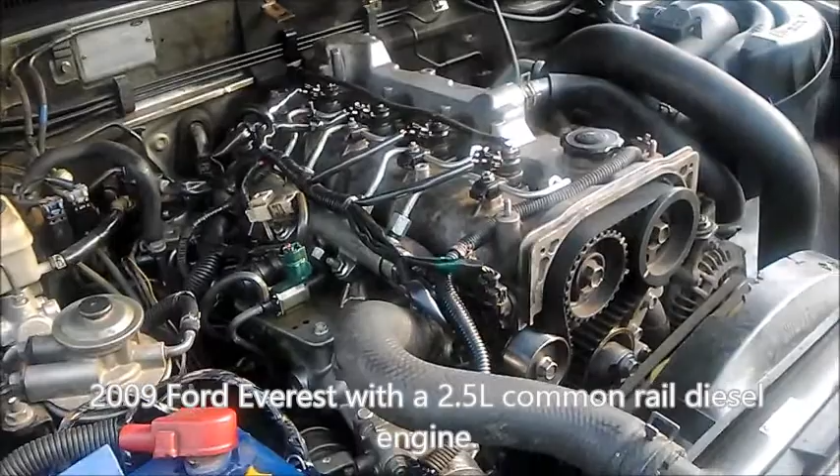Okay, what we have here today is a 2009 Ford Everest with a 2.5 common rail diesel engine. The owner purchased it from an auction. The engine wasn't running. I think it would crank, start, but run very poorly and would stall. So it was towed here.

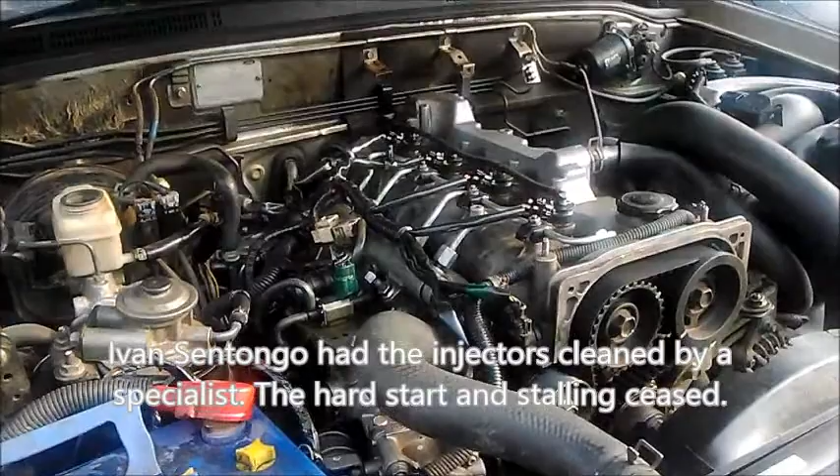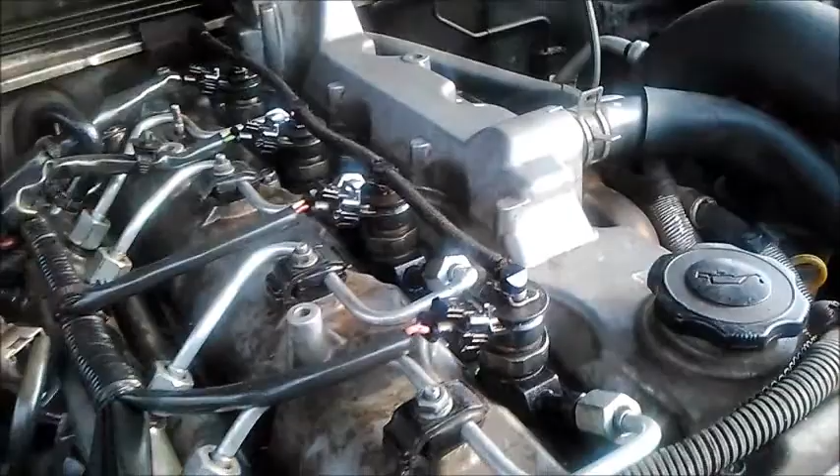Ivan took the 4 common rail diesel injectors off and took them to specialists. They were cleaned up, brought back on the vehicle. The vehicle now runs and actually idles in a stable manner. It cranks fine and idles fine. But the customer complained it felt like it was sluggish, it didn't have power.

So Ivan came, looked at the timing, found it was off a bit, redid the timing and ran again, and the engine is running again. It hasn't been test driven yet, and I walked in this morning and was asked to have a look. So that's where we are at right now. Engine runs, timing has been done, road test not yet done.

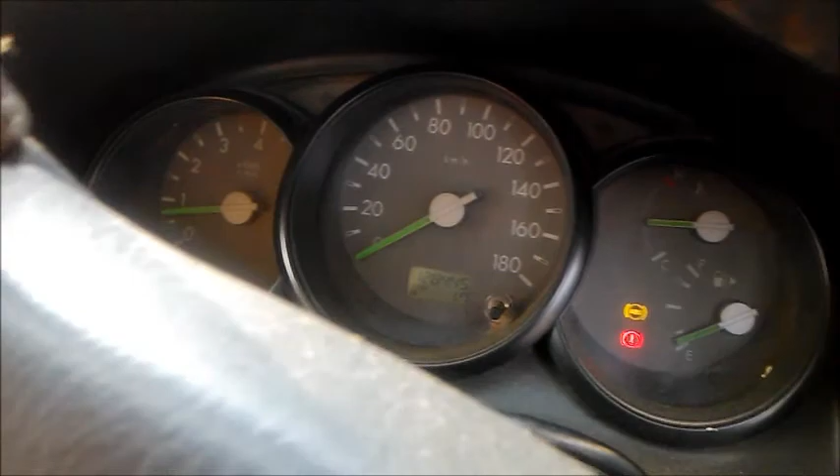Just double checking that there is nothing electronic wrong with it. So that's the engine. We shall go into the vehicle now. It's a 2009 Ford Everest with a common rail 2.5 liter diesel engine. Okay, I'll crank the engine first so you hear it running. Yeah, it's running. Check engine light goes out, but not the ABS light. I'll check that out too.

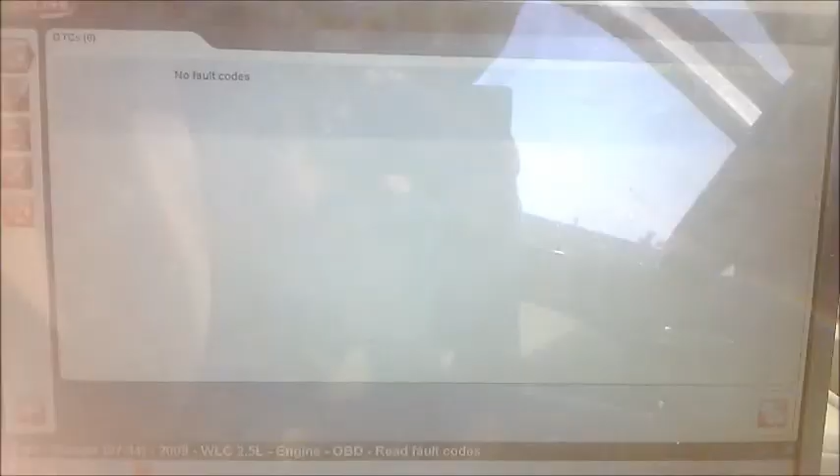So we come to the diagnostic computer. I've already set up the software for the vehicle. Okay, I'm now in. First checking that there are no fault codes on the engine control module, and indeed there are none. Out of interest, I'm first checking why the ABS light is on. ABS will be under brake.

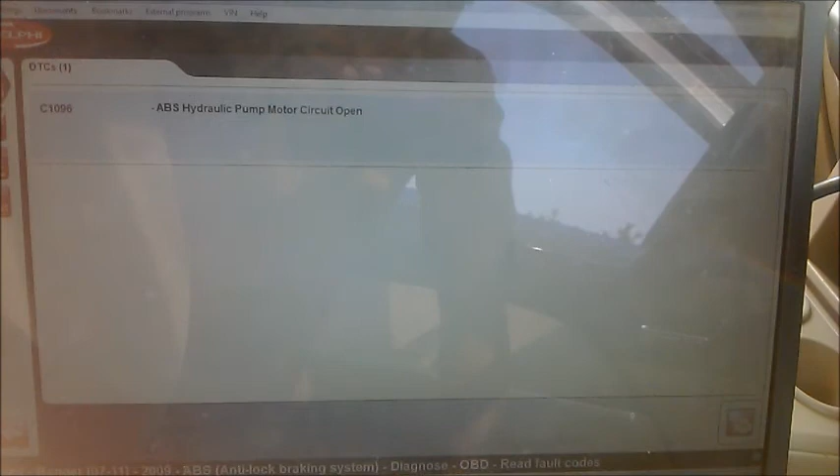Okay, we have a C1096, that's ABS hydraulic pump motor open circuit. So I'll have Ivan check that out. I think that's not a very difficult case to diagnose. I think it's just two wires that feed the hydraulic pump motor. It's very easy to check out its open circuit. This vehicle has been sitting for a long time in some yard where it was auctioned off, so maybe there is a socket off, or the motor itself is bad, whatever.

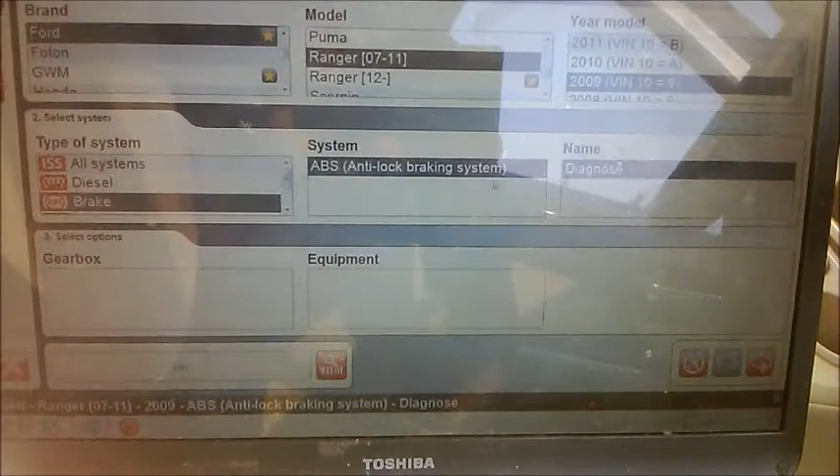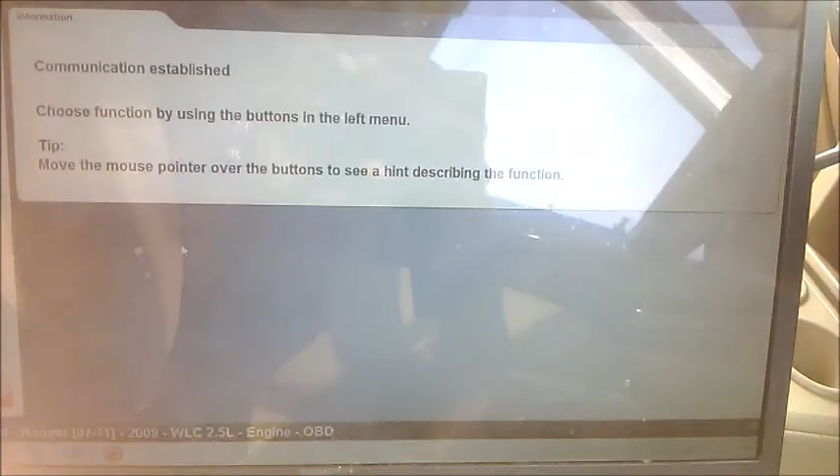Okay, I'll go back to the engine issues, which is where my main interest is today. Once again, no fault codes. After that, I want to go into real-time data, and actually, I wanted to look at the fuel pressure, but this engine is idling normally, and even when you step on the accelerator pedal, the engine runs okay, sounds okay. So I think the fuel pressure is okay.

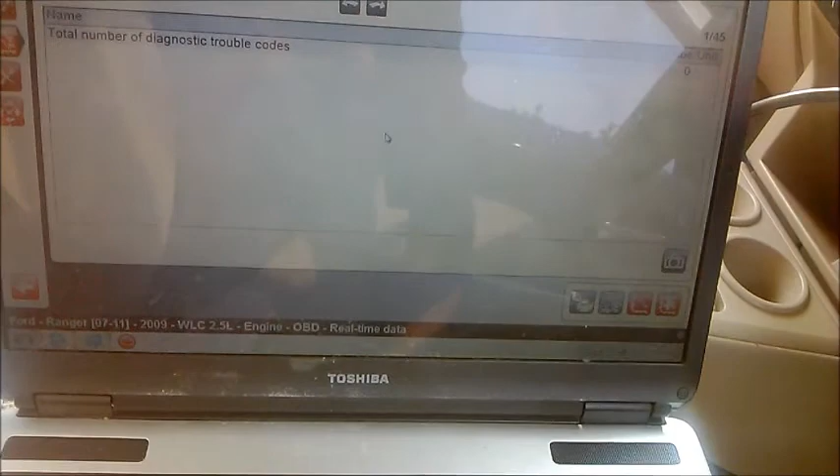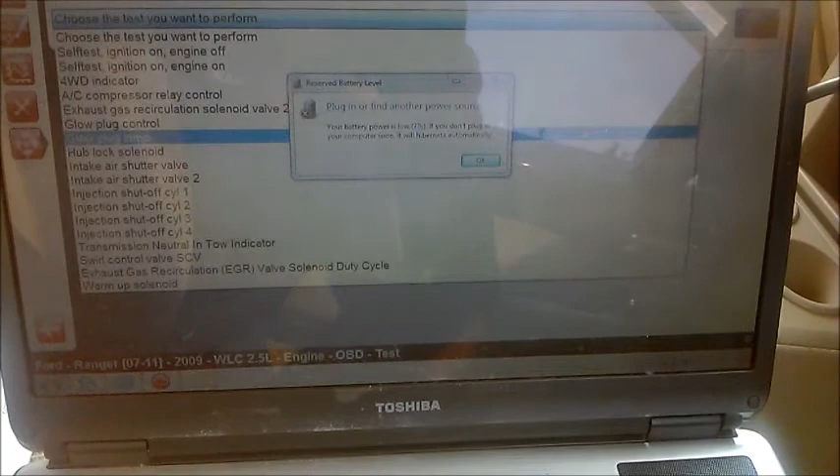I'm not really going to go into that at this moment. I want to check that all the injectors are contributing kind of equally. So I'll ignore the real-time data for now and go into the engine testing software. Oh, my battery is running low. I want to test the injectors first. Injector number 1 contribution. I'm testing it. I don't know if you can hear the vibrations. It kind of misfired a little when I shut down injector number 1, which tells me that injector is contributing.

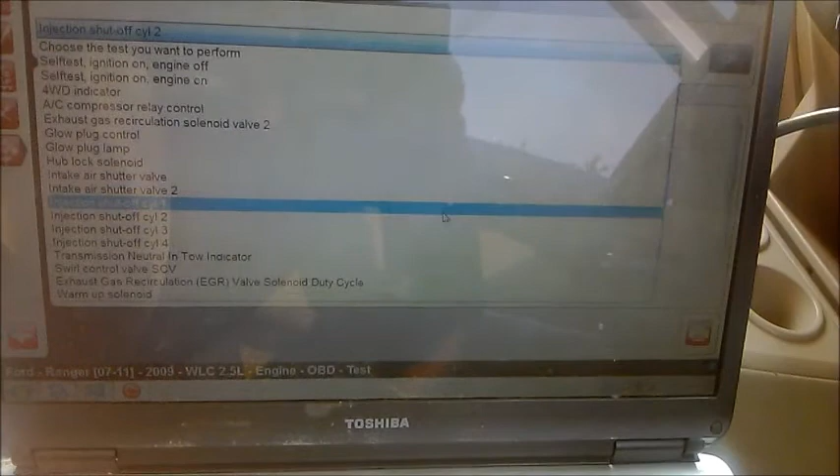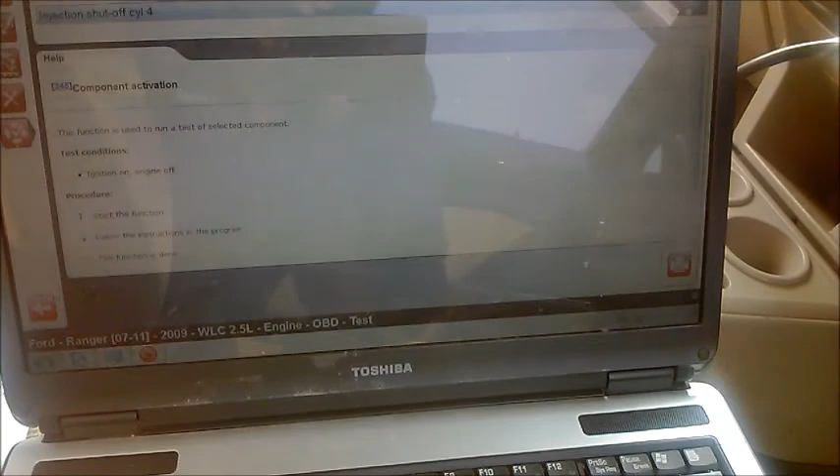I'm doing the same thing for number 2. A bit of misfire, so that injector is contributing. Number 3, engine misfiring. I don't know if you can see the shaking of the cable here when I do that. So that injector is also contributing. And then we go to the last injector, injector number 4. That's a bit of a misfire when I shut down that injector temporarily. So all the injectors are contributing equally.

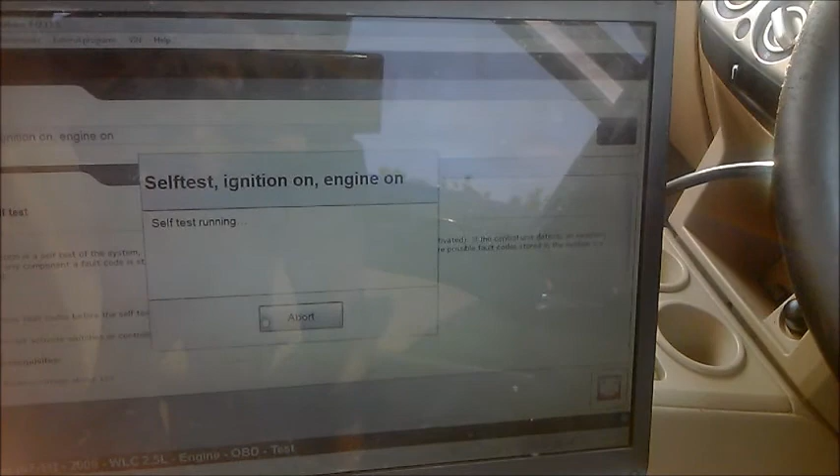I'm also going to tell it to do a self-test with the engine running. So the ECM is going to do a self-test. Oh no, just about to command it. Okay, the self-test has started, and you can see the engine vibrating. I think it's testing the injectors and other components. It's misfiring a bit, so it's checking various things.

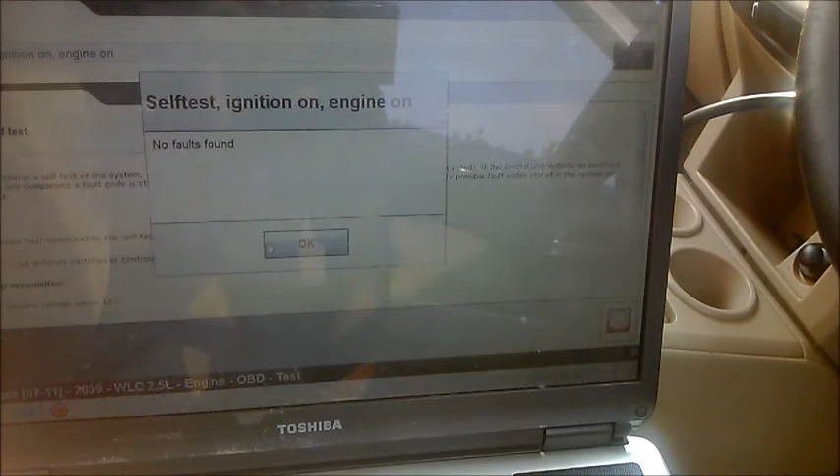Still misfiring. Okay, it has finished the test. The engine is running okay now and says it hasn't found any faults. Okay. No, I'm not going to erase any codes because there are none anyway.

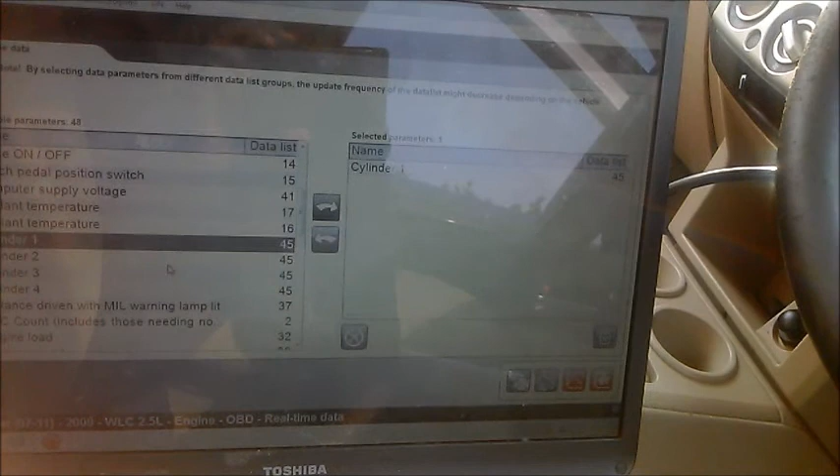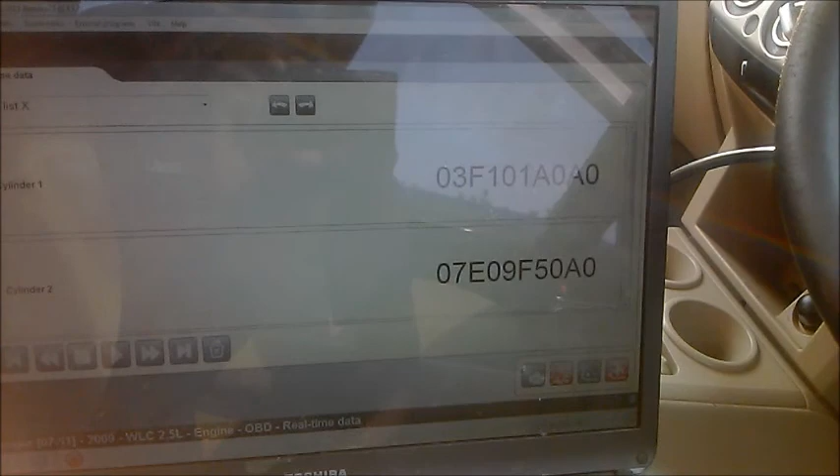So I want to go into real-time data again, the custom list, and my main interest is in seeing the data for the programmed IDs for the injectors, plus maybe I can throw in the... okay, that's what I want to see for now. And okay, that's the programmed injector information.

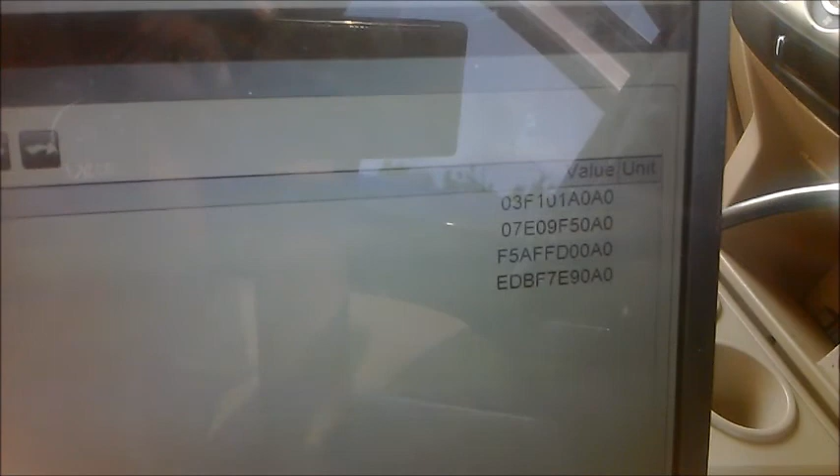Those numbers, you normally find them on the injectors themselves. They are normally printed. They tell the engine control module the characteristics of the injectors. So the engine control module deals with the injectors knowing their characteristics, and it handles each injector separately from the others.

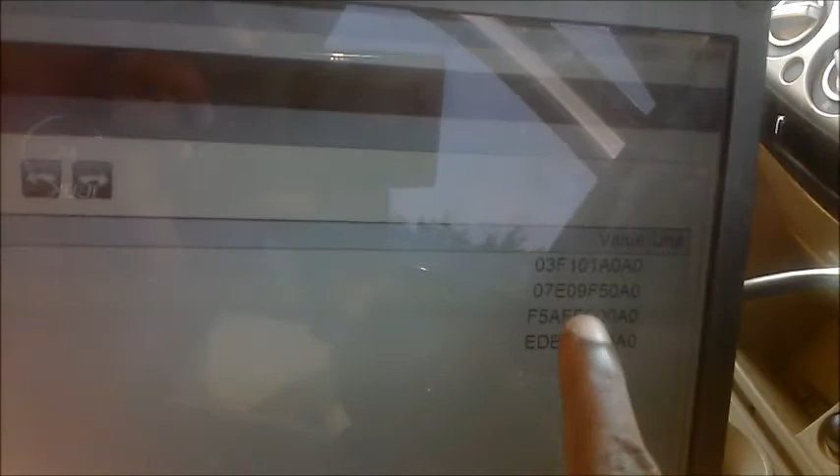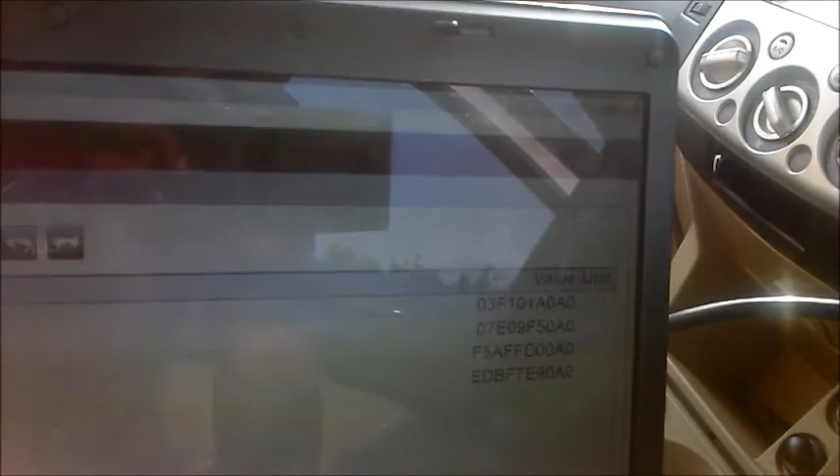So I need to be sure that what I'm reading here, in that order, those numbers are matching on the engine. In other words, the injectors are in the correct positions on the engine according to how they were programmed on the computer.

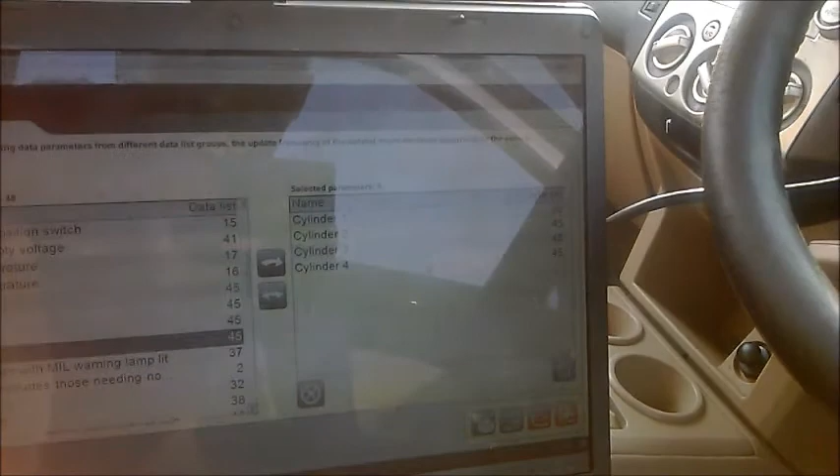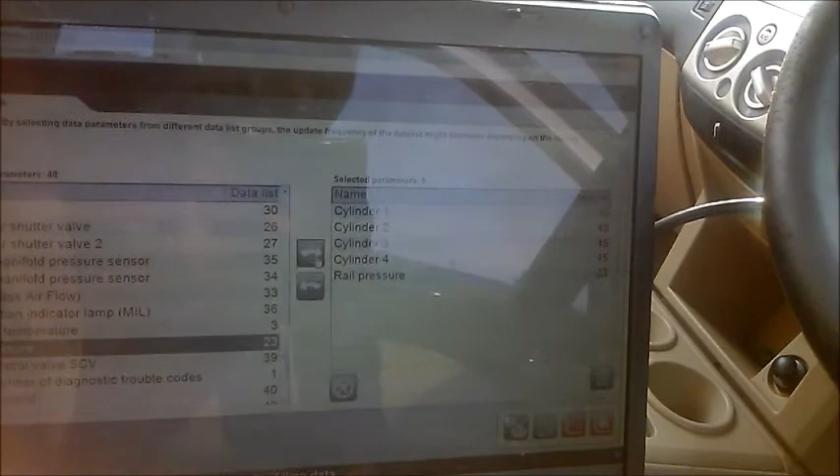Before I go back to the engine bay, I was thinking maybe I could check the fuel rail data too. Fuel rail pressure, where is that? Okay, there. Throw that in, have a look at that, 34 MPa.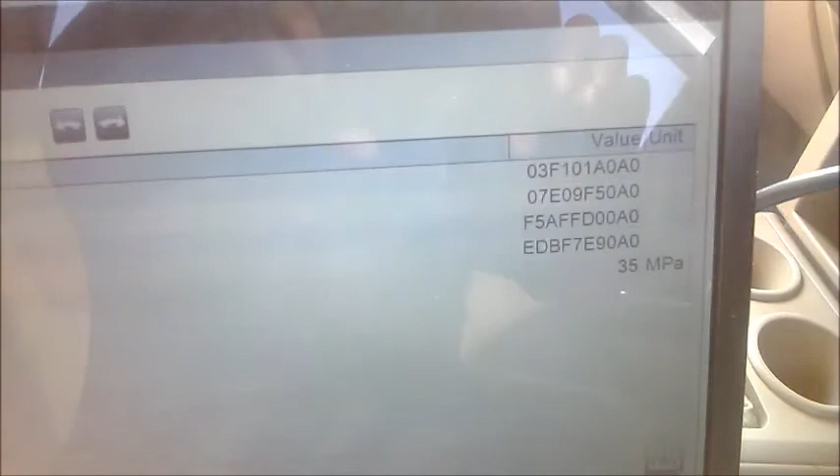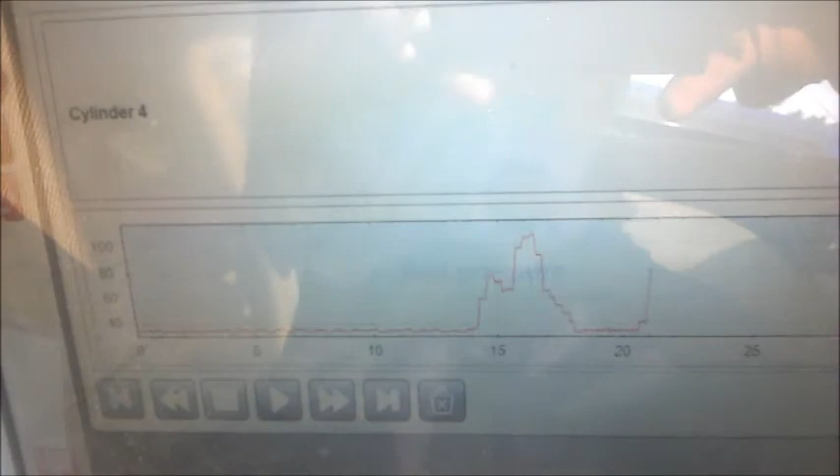If I try to rev the engine up, I want to see that going up, and it is. I want to see it in graph mode. Right, so the graph is there. Let's see it going up. Okay, what that tells me is at least the fuel pump can keep up with the commanded rail pressure.

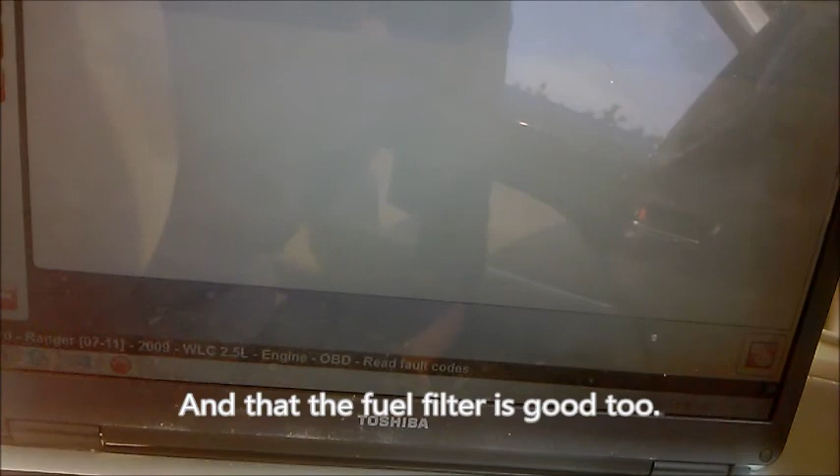So final thing, my laptop battery is warning, it could go out any moment, but the final thing I want to do is go and check that there are no fault codes, and I don't have any, so I don't think I have fuel rail pressure issues in this case.

I'm now going to the engine bay. I'm going to make note of the numbers on the injectors in their sequence, and then compare them to how they are programmed in the vehicle. My laptop battery has actually kind of died on me, has it? Yeah, I think so. It's shutting down.

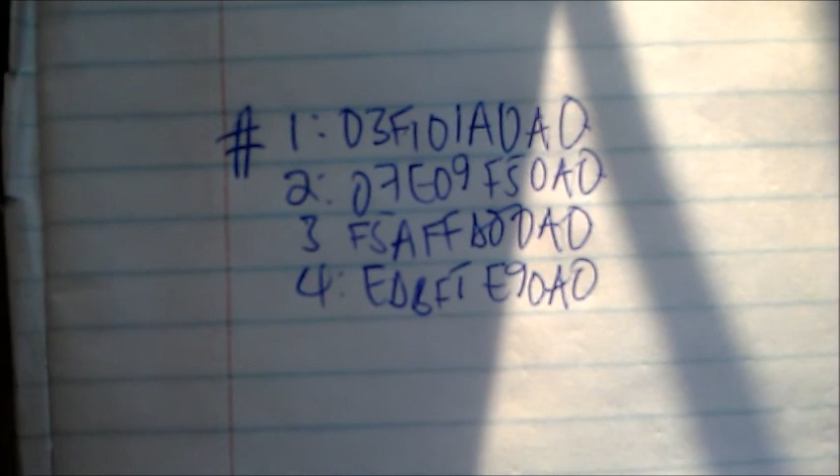So I'm going to check the injectors directly on the engine, and I've already made notes of the injector codes. So I'm going to compare them against what's actually on the engine. In what order are they on the engine, or are they even the same numbers that we saw being programmed into the ECM? Are they the same, or are they even in the same order if they are?

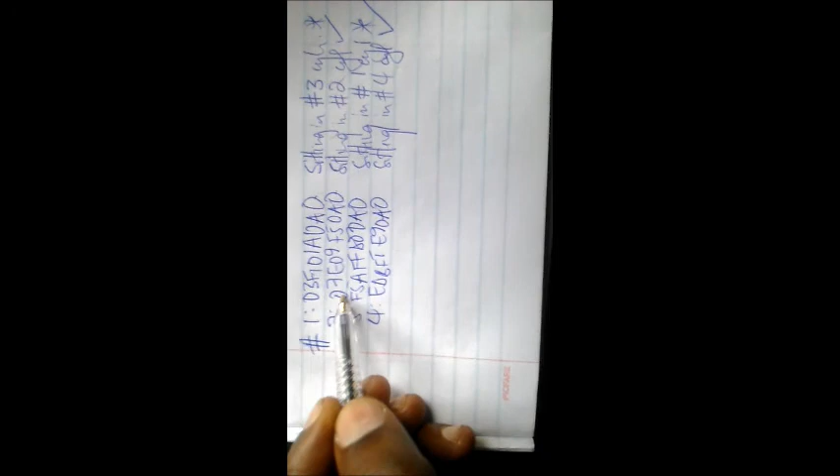Yes, so while the laptop is charging up, I went round to the engine bay. These are the injector codes that were programmed in the computer, and I discovered that the injectors haven't actually been changed since then. They were just cleaned up.

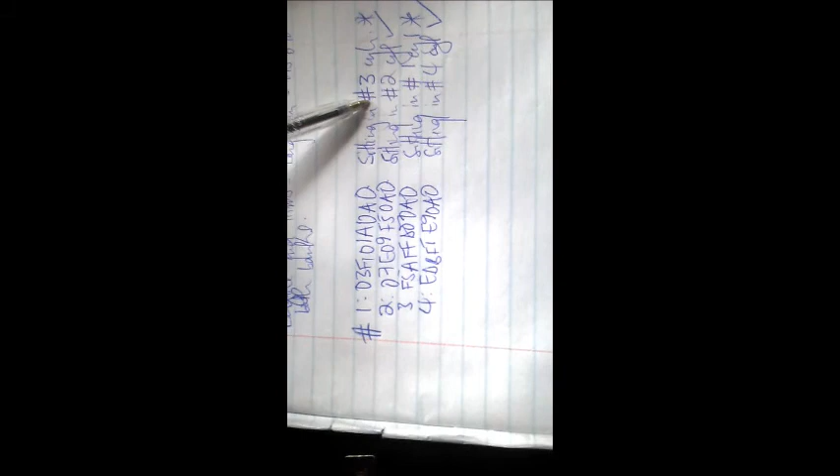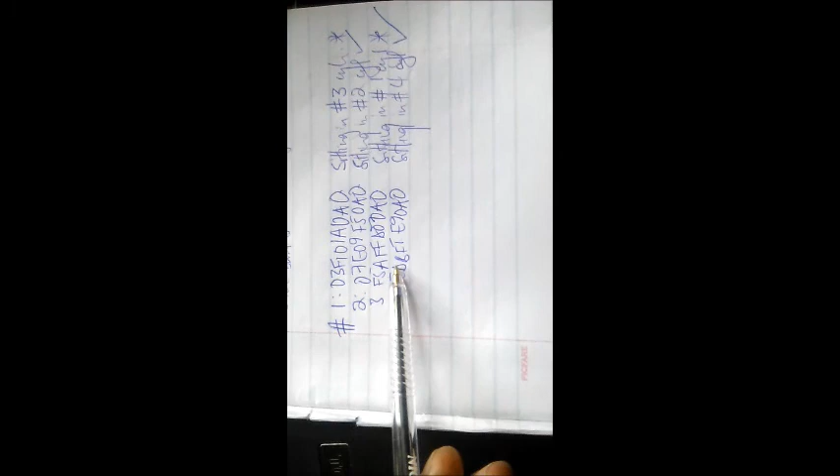I discovered that the injector with this code, which is supposed to be for number 1, is sitting in the cylinder number 3 location. So that's wrong. This injector needs to be moved. Injector number 2 is sitting in the right position according to the ECM programming. Injector number 3 is sitting in cylinder number 1, so this needs to move to number 3 cylinder, and injector number 4 is also sitting in the correct position. So injectors number 1 and 3 have to be swapped around.

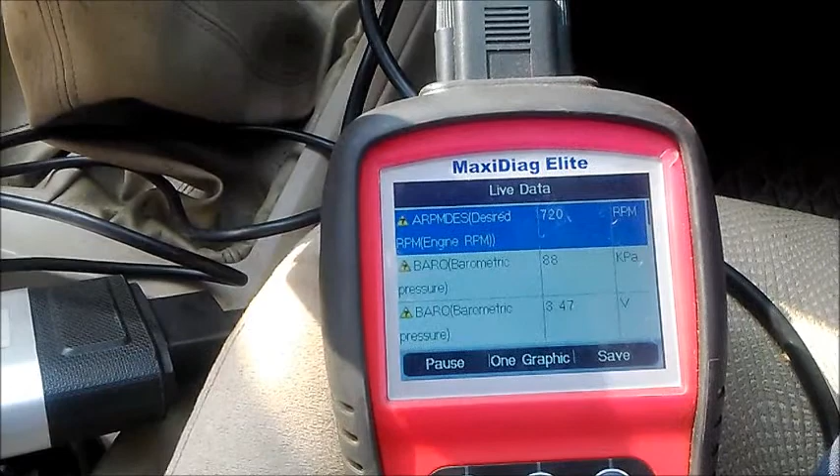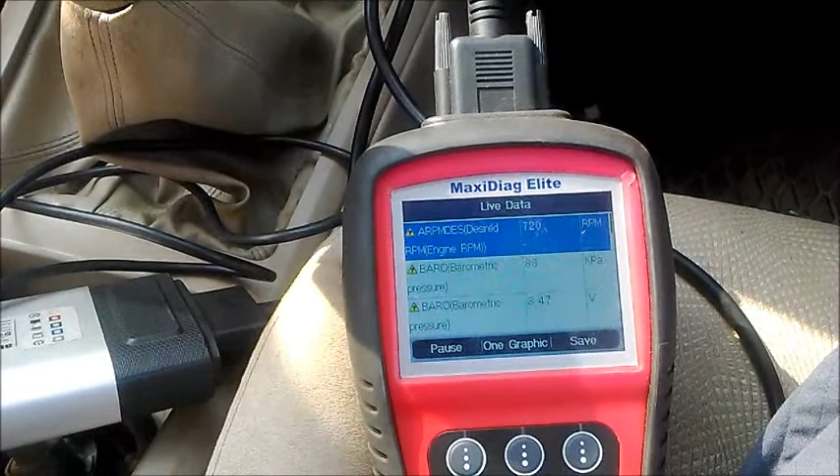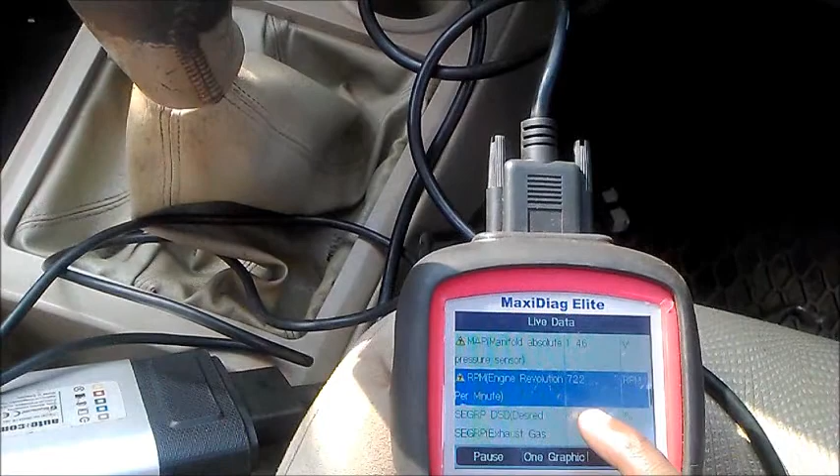Okay, we now want to rule out very quickly any mechanical issues, obvious mechanical issues, using the diagnostic tool. Because the laptop is still charging at the moment, I'm using this other diagnostic tool. I wanted to compare the desired RPM to the actual RPM. The desired RPM at idle is 720, and if we scroll down and look at the actual RPM, it's hanging around there, as you can see highlighted there. So it's drifting around a bit, but that's fine.

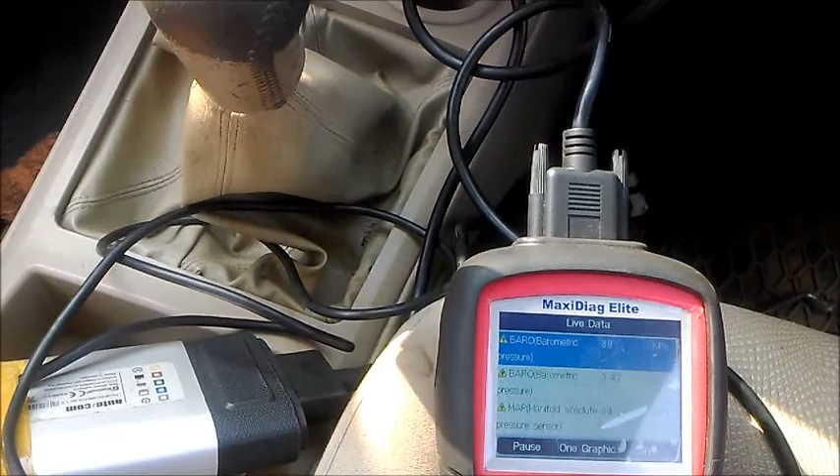So the ECM is in good control of the RPM, which is a good symptom, at least with regards to injector control. And also very quickly, to rule out turbo boost issues, I needed to compare the barometric pressure signal. That is the signal and that is the interpretation. On top highlighted is the interpretation of the ECM of the signal with regards to barometric pressure, and I can confirm with where we live that the correct number you should be seeing is 88 kPa.

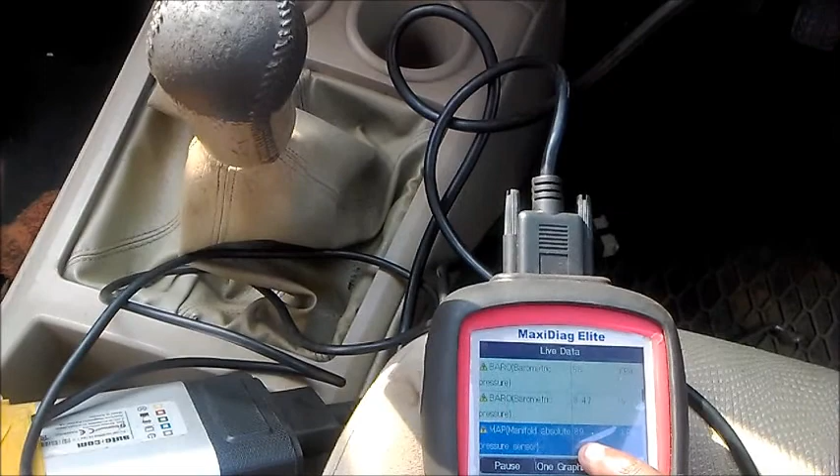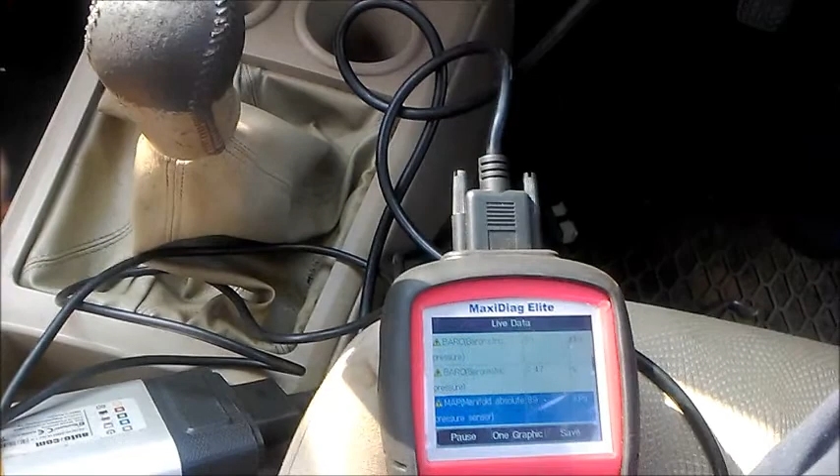And then compare that against the MAP sensor reading. At idle, without any boost or with very little boost, the MAP reading should read very similar to barometric pressure. But once you speed the engine up and the turbo does any boost, you should see the MAP...

Sorry, I got interrupted by a phone call, but

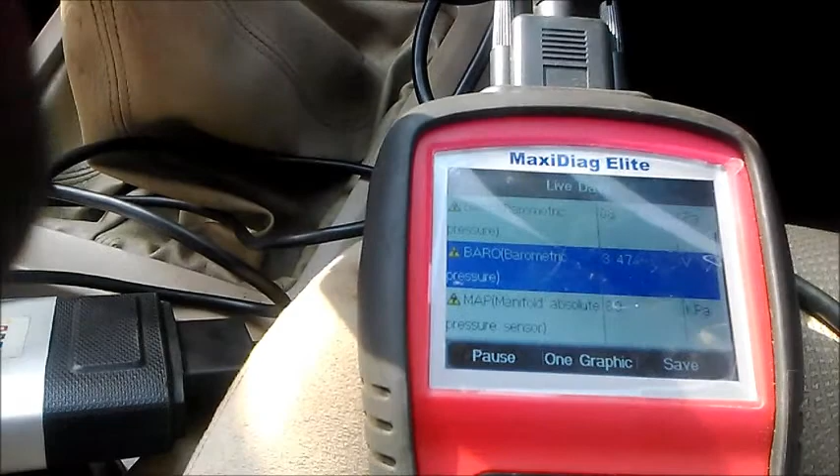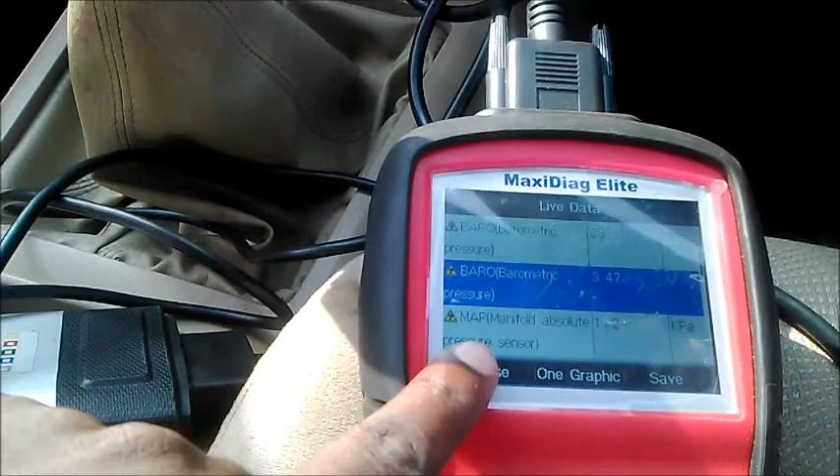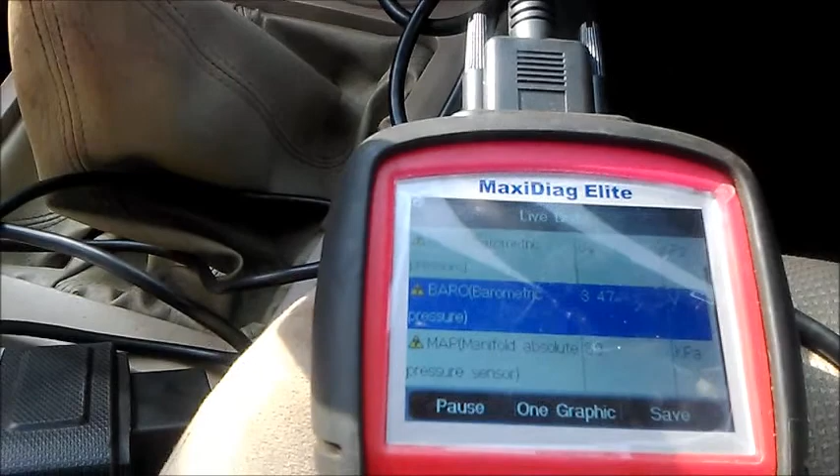comparing the barometric pressure reading versus the MAP sensor reading, once we rev the engine up like I am now, we expect the MAP sensor reading to go up, and it is, as you can see. It's going up to, I think I've seen a peak of even 180 kPa. So to me that is a turbo that's responding, that's creating pressure.

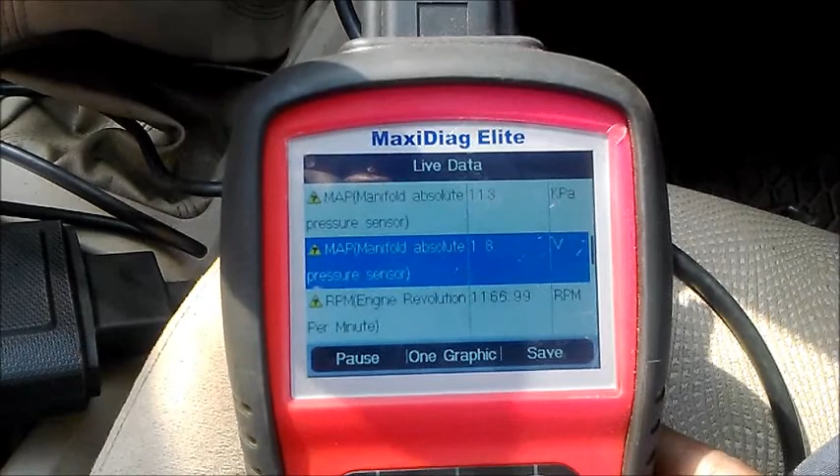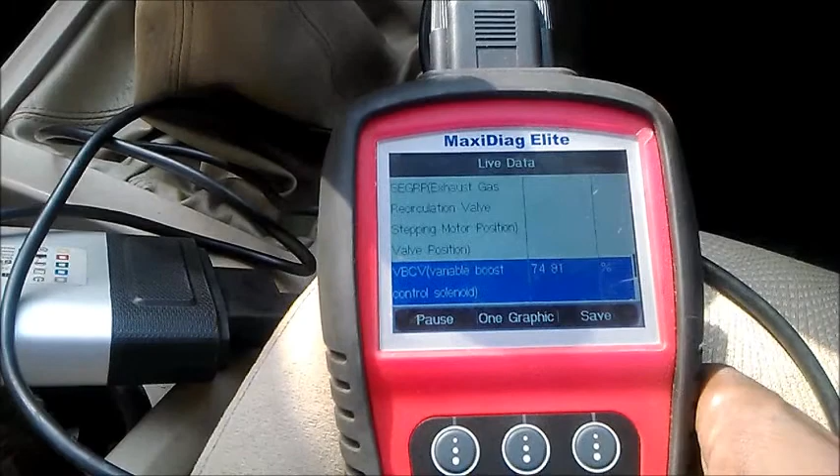The actual voltage signal from that sensor is right there, and we can watch it too. See that it goes up and down as I rev and release the gas pedal. I think I'm happy with both the MAP sensor and what it is telling me. And finally, I wanted to see something about this EGR valve. Apparently it's on all the time. Oh, the turbo,

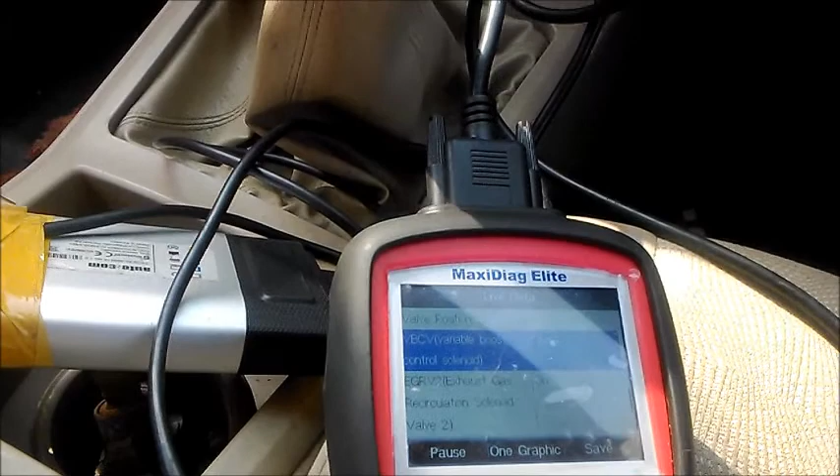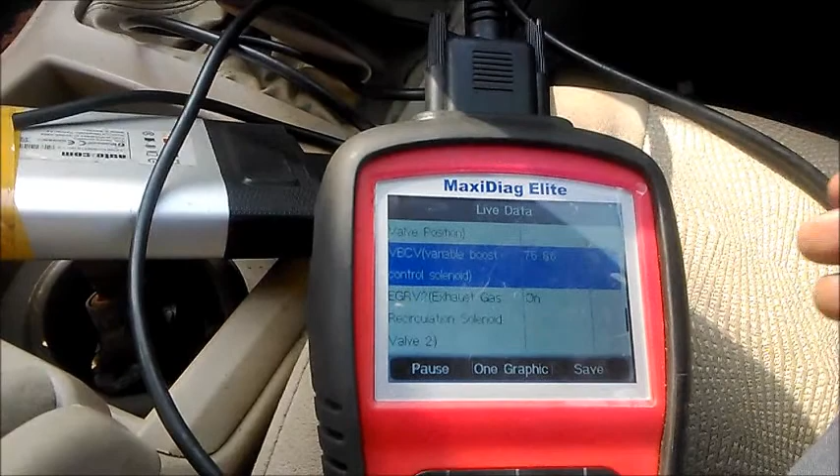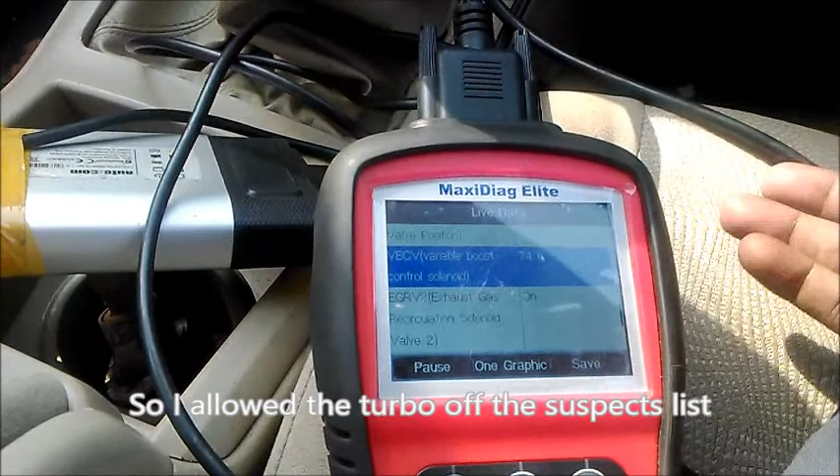the duty cycle commands for the turbo valve. There is a solenoid valve that controls the position of the vanes in the turbo. I need to see it switching downwards from those higher figures to lower figures as I rev up, and it's doing that. So the computer is doing its job with regards to controlling the turbo through the solenoid. It's sending the right command, the solenoid is responding, the turbo is responding, and I get what I think are the correct MAP sensor readings. So I think I will move away from the turbo issues.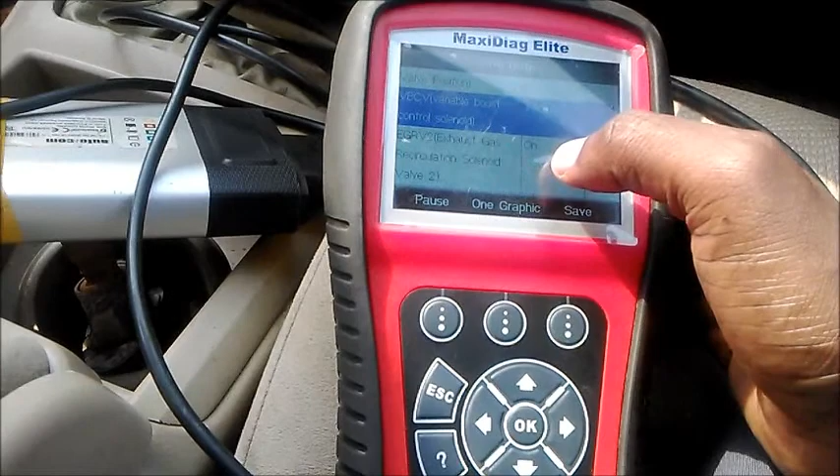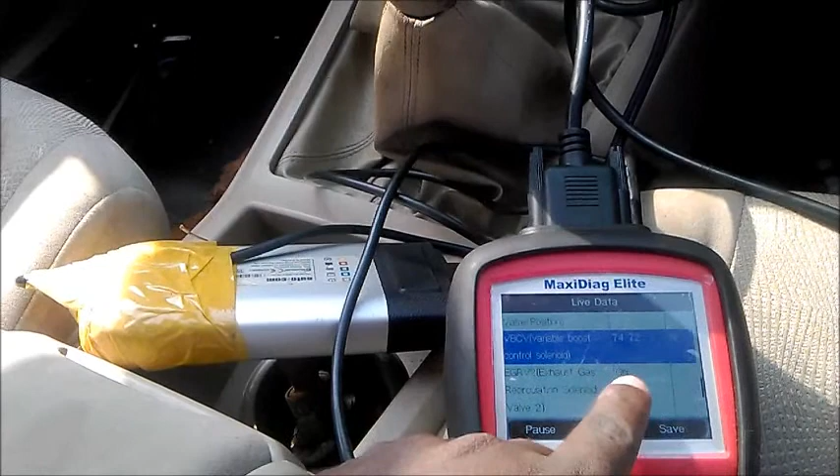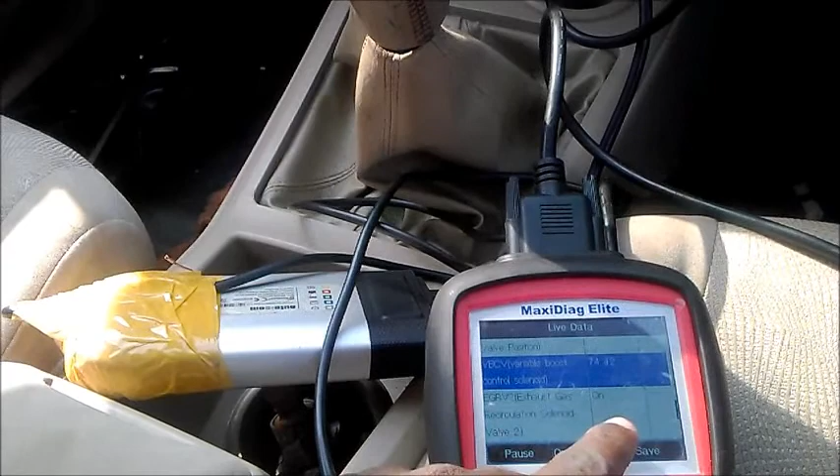And then the EGR looks like it's always on with the engine at idle. I don't think I can force it to be turned off. I can't force the ECM to turn it off, because I think it will normally do that when you're driving, and right now I'm parked in the garage, the vehicle is stationary, but I'm assuming for now that the EGR valve works like it should. At least I think with diesels the strategy is normally the EGR is open at idle or lower engine speeds, and at cruising speeds I think that's when it's shut off.

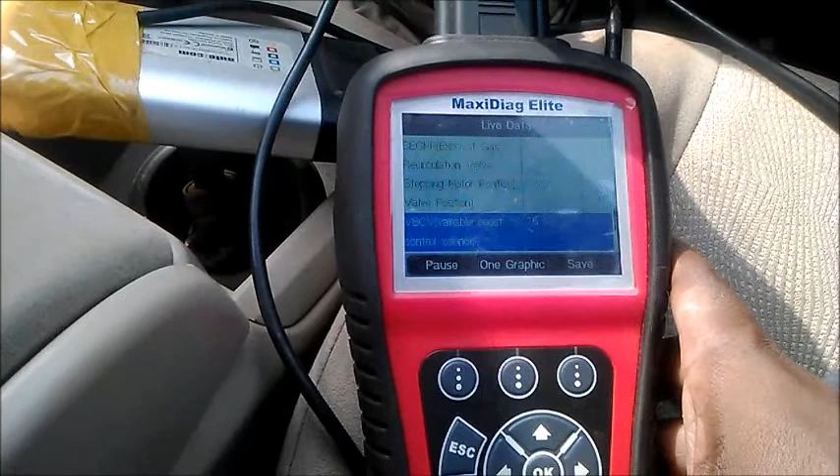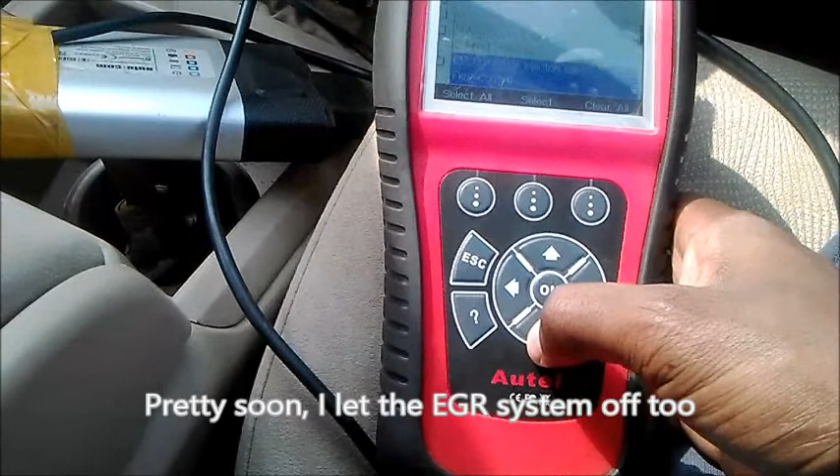I think the computer was also giving me data for EGR valve control. Oh, I have to reset my data list again, but we had seen most of what I wanted to show you. What do I want to show you now? Maybe EGR, desired EGR gas, EGR valve position, which is

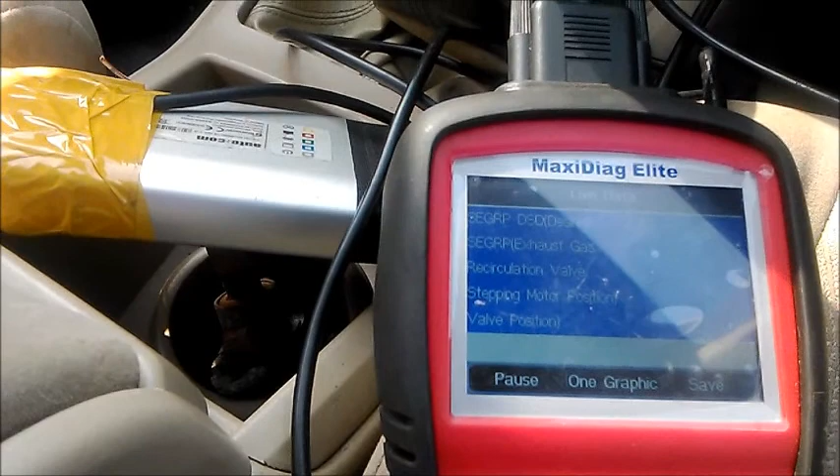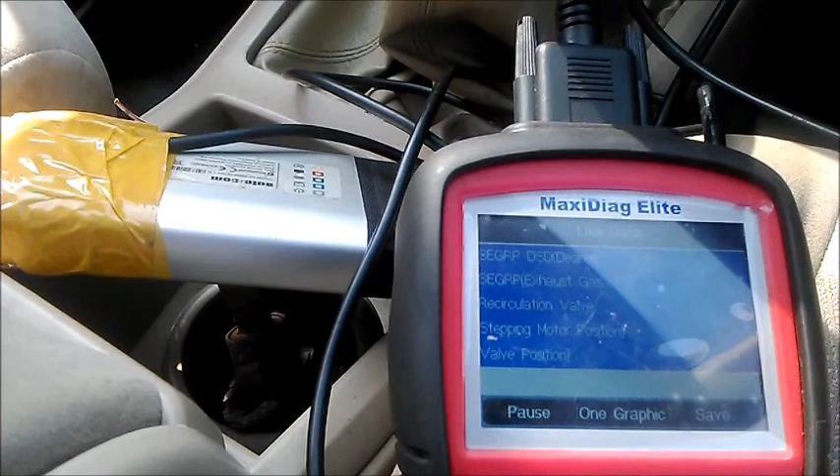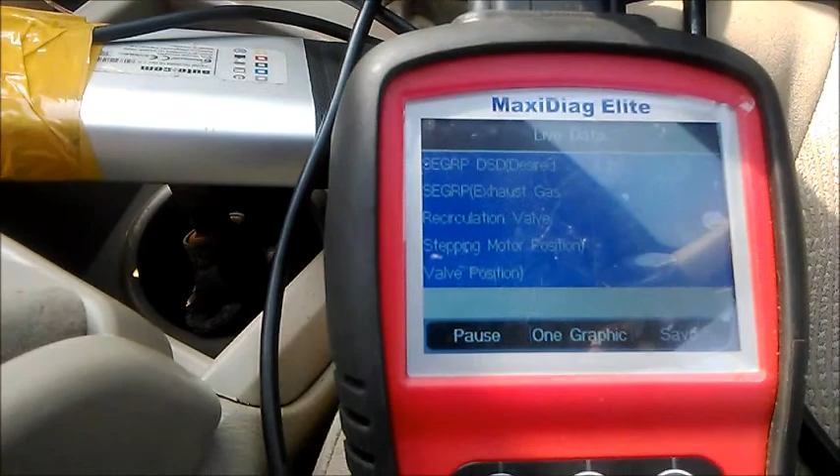that. I think the duty cycle for that is normally low with the valve open, and once the ECM needs to close that valve, it will increase the duty cycle. I can't seem to be able to force it to command the EGR to close, but I will ignore it for now, because earlier I did an engine running self-test, and it returned no fault. So at this point I will assume the EGR is working like it should be. We've ruled out turbo issues for now. Yeah, I think that's about it.

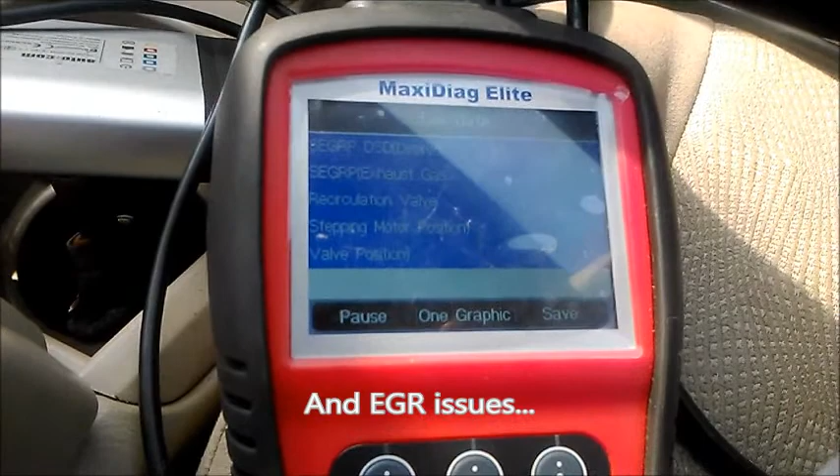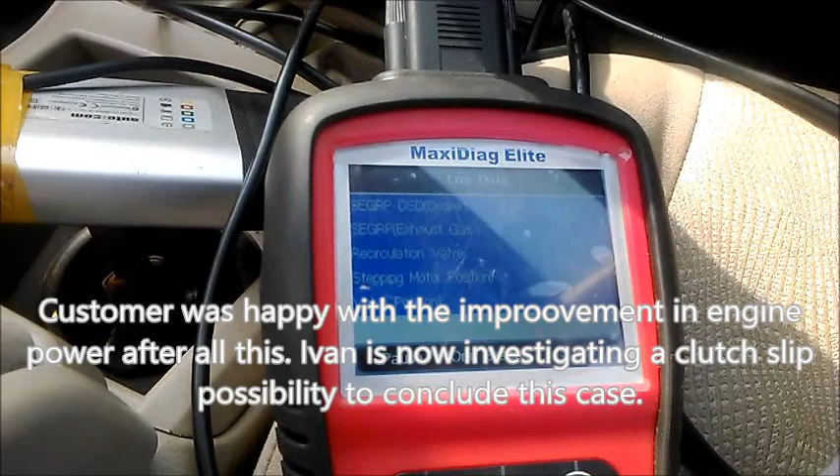If this vehicle doesn't improve, maybe there is another mechanical issue that I can't pick out. Maybe I should disable fuel and then crank the engine and look at the relative compression of the 4 cylinders, just to compare the 4 cylinders against each other with regards to compression. I think that should be the last step we take with this one.